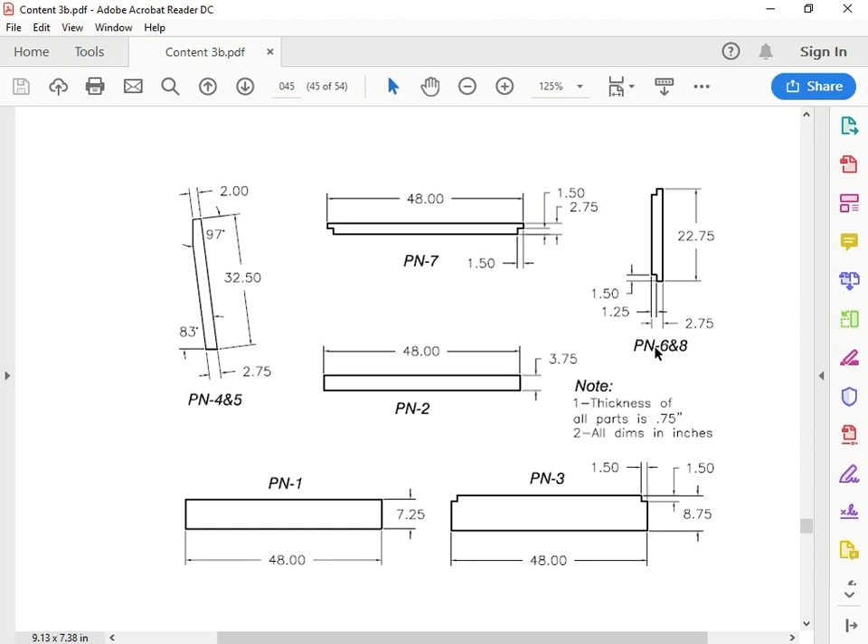Okay, so last time we built all the pieces. There's part 1, part 2, part 3, part 4, and 5, which means we're going to have 2 of these pieces. 6 we have here, 7, 8 again, and we're going to assemble the piece together.

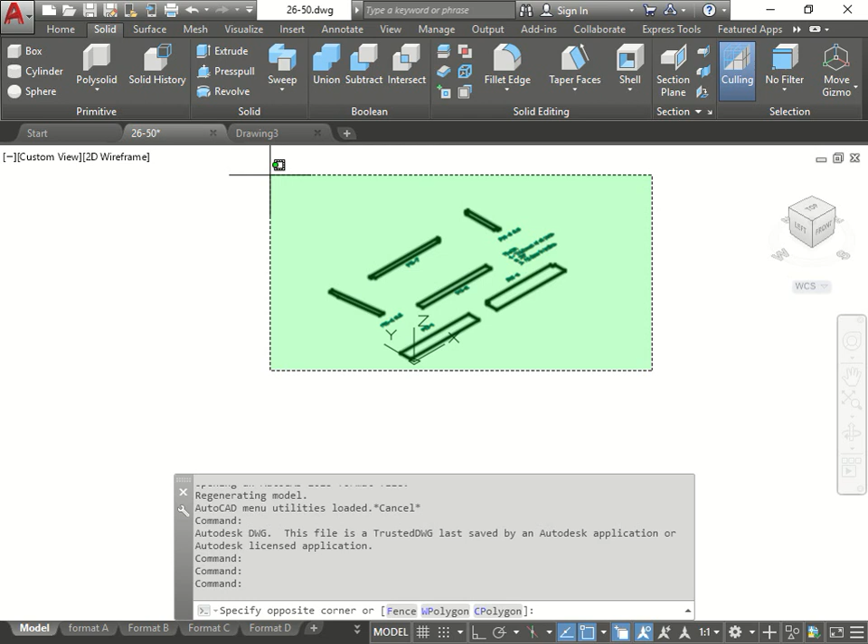So we're going to open up the file we worked on before. If I close it, in this case it's open. I'm going to start a new file like we've done before. Open a new file, go back over here, and now we're going to select everything we did before. So I'll do copy, then go back to the new file and paste it in. Why am I doing this? This way we have the pieces and we don't affect our other sheets that we had worked on before.

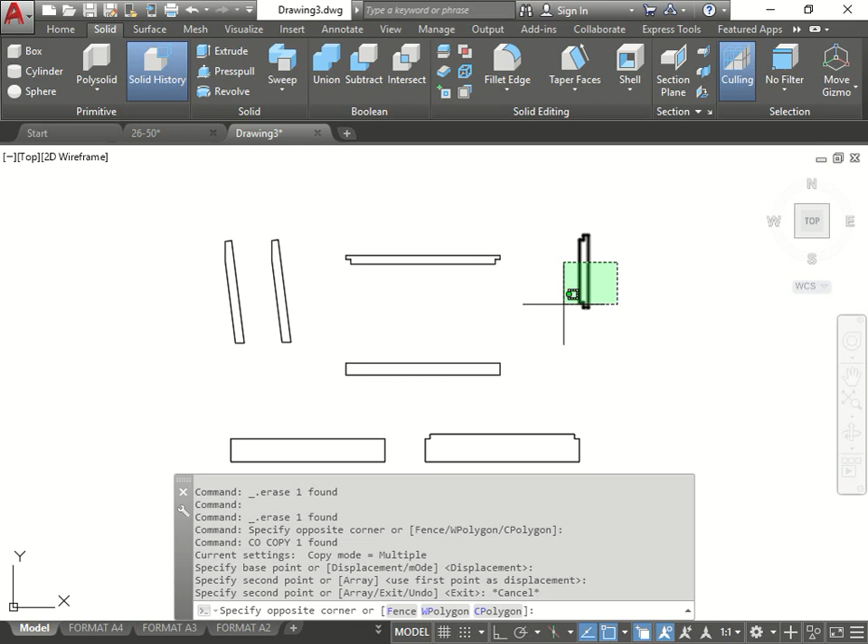Now we notice that this one here should be copied 2 times, so we'll copy it over. And like we saw before, this one here should be copied 2 times too. So now we have both pieces copied together. The next step is we're going to start assembling.

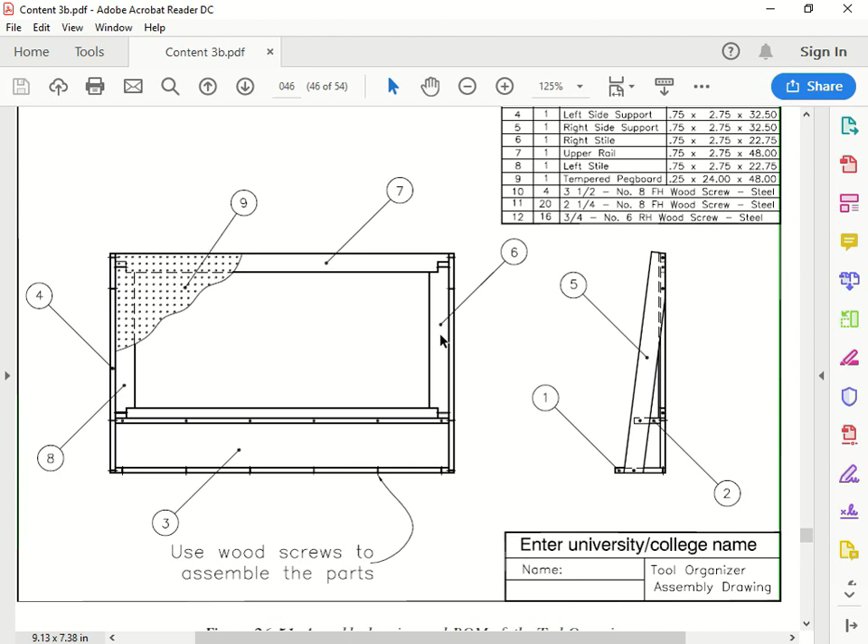So let's go look at the assembly page. This is the assembly of what we're going to be building. If you notice here, we have our pieces. We have the first one at the bottom. There's the second piece, which is the little shelf area, right over here. Then we have the third piece, which is the back. Then the fourth, which is the side. The fifth, which is the other side. Then comes the sixth piece, over here. The 7th is on top, and the 8th is over here. And then we're also going to do this view here at the end to show it when it's done. All right, so that's what we're going to be assembling today.

So we took the pieces we already built last time in the first part. If you didn't see the first part, how we built them, you could look at the other one, called part 1. Now we're going to start assembling it.

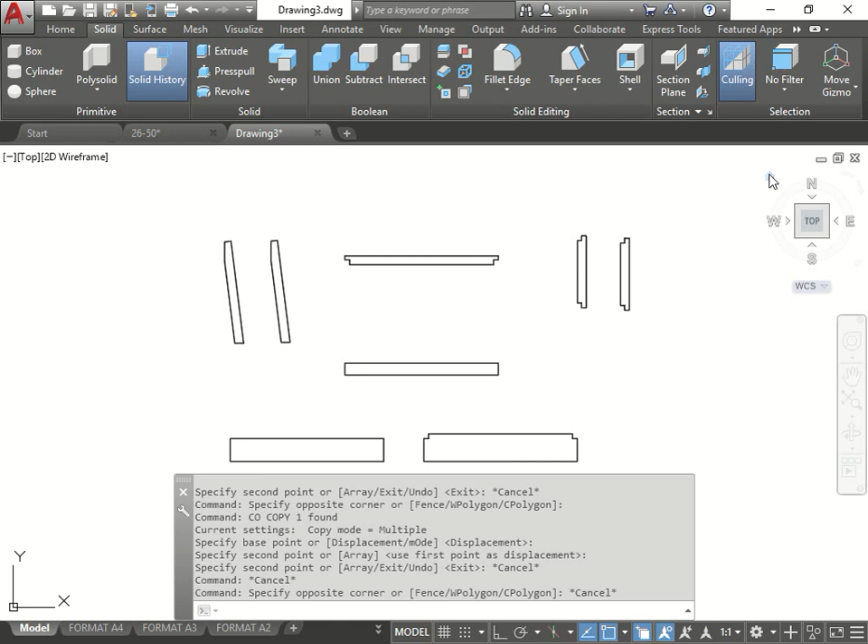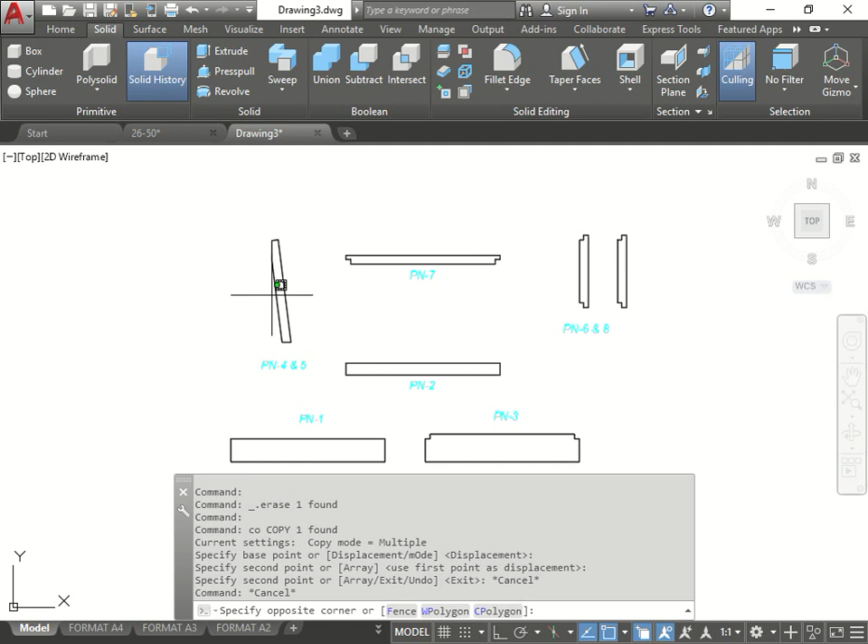Let's go right away and put our 3D view. I could decide which one to start with. I'll start off with grabbing number 3, which is the one over here. I could have kept the names to make it a lot easier. Maybe I'll do that so we know which one is which. There we go, I'll keep the names for now, and I'll just copy this one over to this side, and this one here, copy it over to the other side. So now we have the names. I did a little bit of undoing.

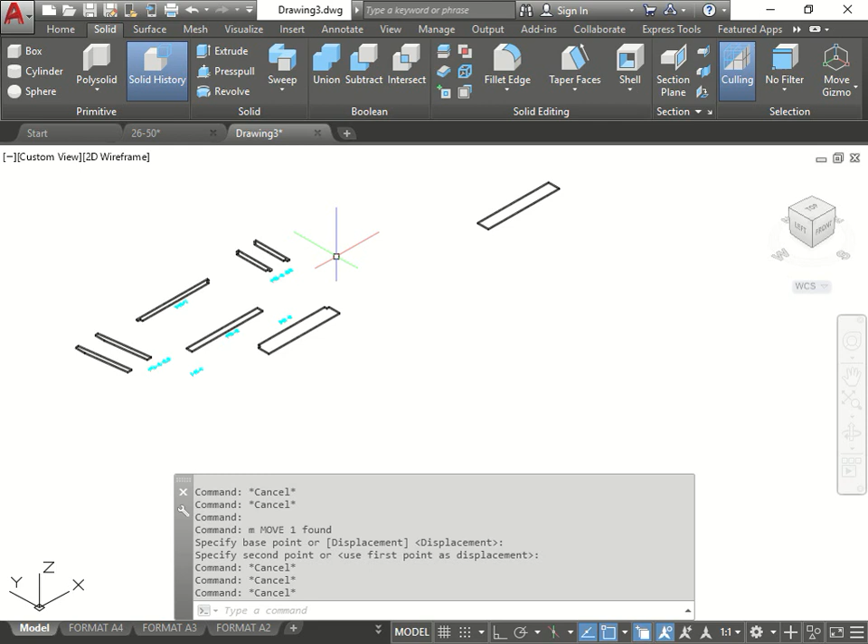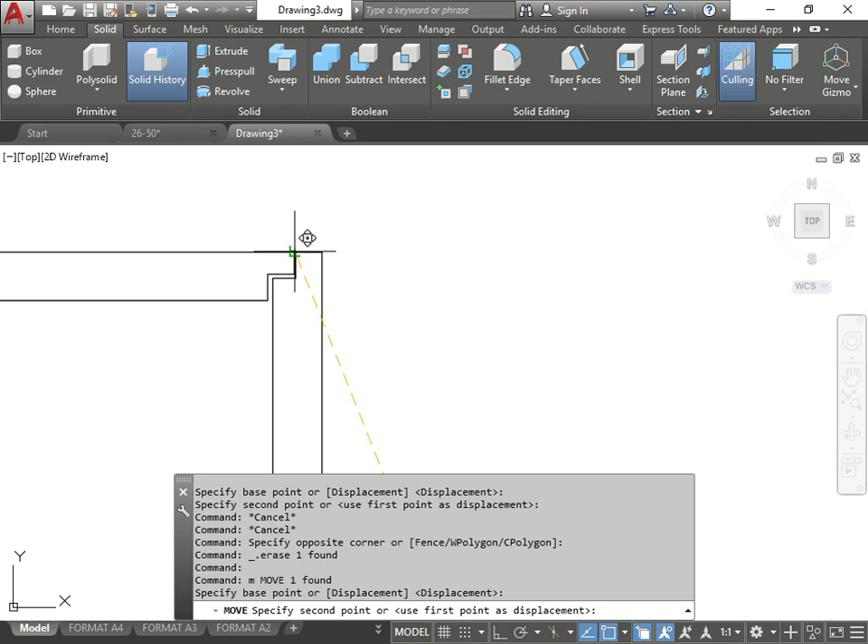It's okay, let's go start assembling it. So now we have the first piece, which would be this guy over here. We're going to move him over here so it's out of the way. Then we're going to go to the next piece, I guess we could build a frame right away. Let's do it from the top view. Let's grab number 7, which is on top, and move it up here. We don't need this anymore. We're going to grab number 6 on the side, and move it from this corner here, pushing it to this corner over here. Is this right, 5, 6? Yeah, it should be.

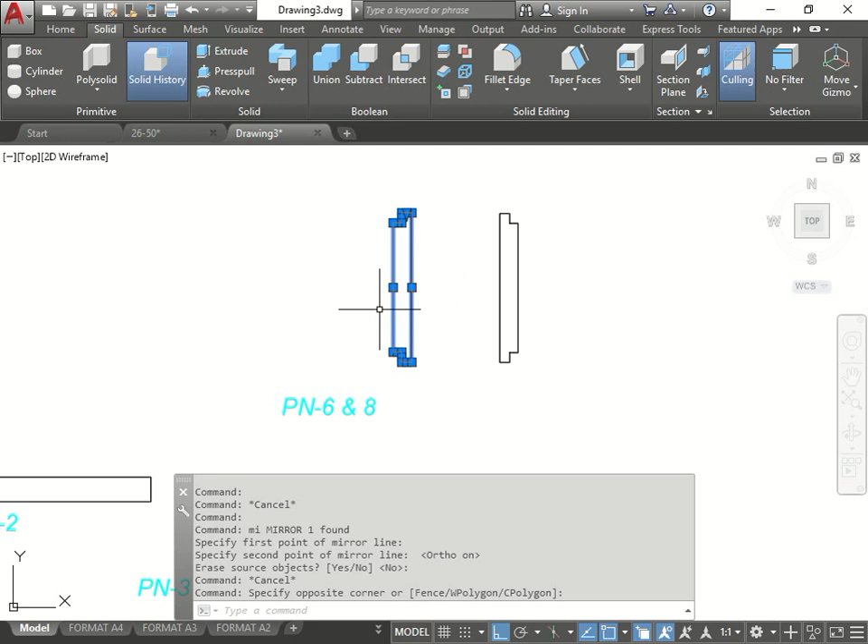Something looks wrong here, we're going to try it afterwards. We're going to put this one to the other side. We're going to mirror this over using the mirror command. We're going to grab this guy and move him to the other corner.

We're going to check afterwards in 3D what's wrong with it. We're going to go here. Oh, there we go, it goes on the inside. That's what I did wrong. Go move, this piece here should go here.

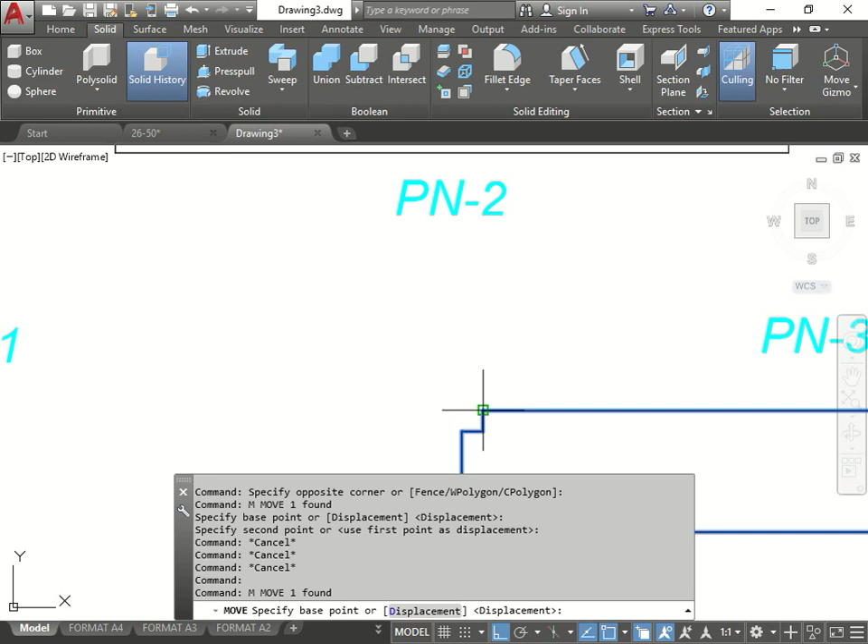So now we have the frame. Now let's add the bottom part, which is P3. Move it up, and we're going to move it all the way up here as well. So now we have the 3 pieces set.

Let's go look on the 3D how it looks. As of right now, they all look good except for a few. Some of them are a little bit higher. So these are good, the first 3.

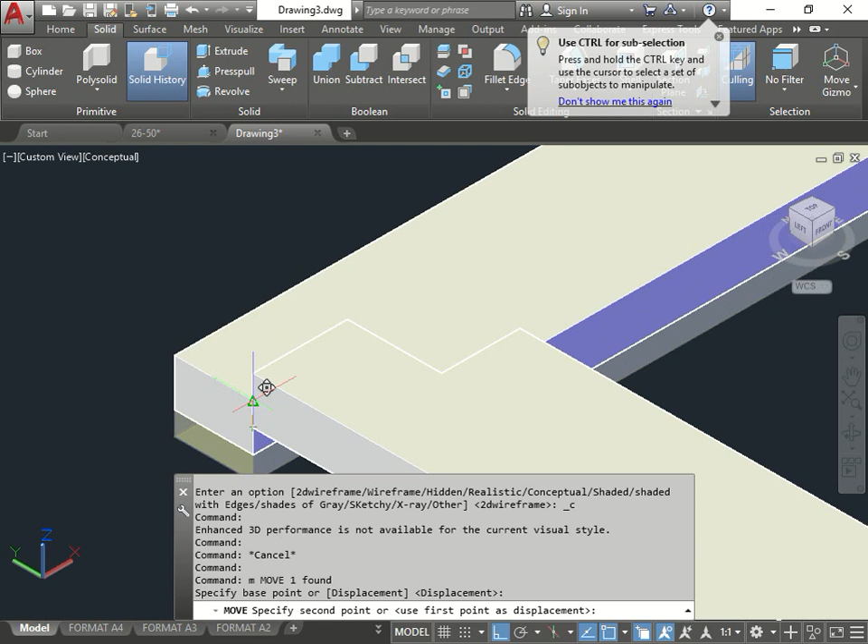The first one we did was a little bit low, so we grab it, we move again, grab from the snap from one corner to the next. So now we have the completed whole piece.

What we can do next is grab everything, use the 3D rotate that we worked on, and go on the red and go straight up. Accept. And now we have the top piece.

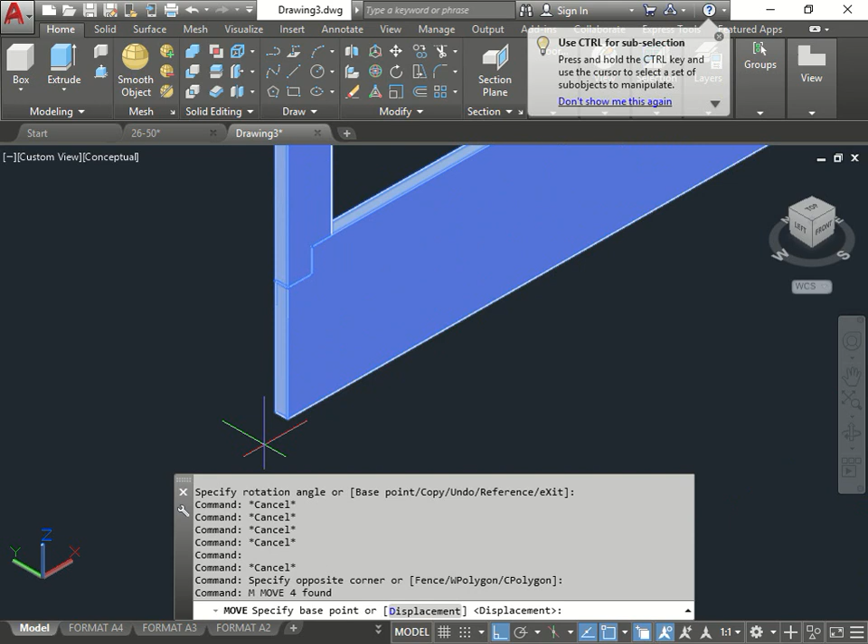We're going to grab now the whole completed piece, and move it on top of part 1 that we worked on before, which is right over here. Right here is number 1. So now we have the assembly.

So all that's missing now, we get rid of this, is we're missing, this one here would be the opposite as well. I can mirror or I can rotate it. P2, yeah P2 is going to be right over here.

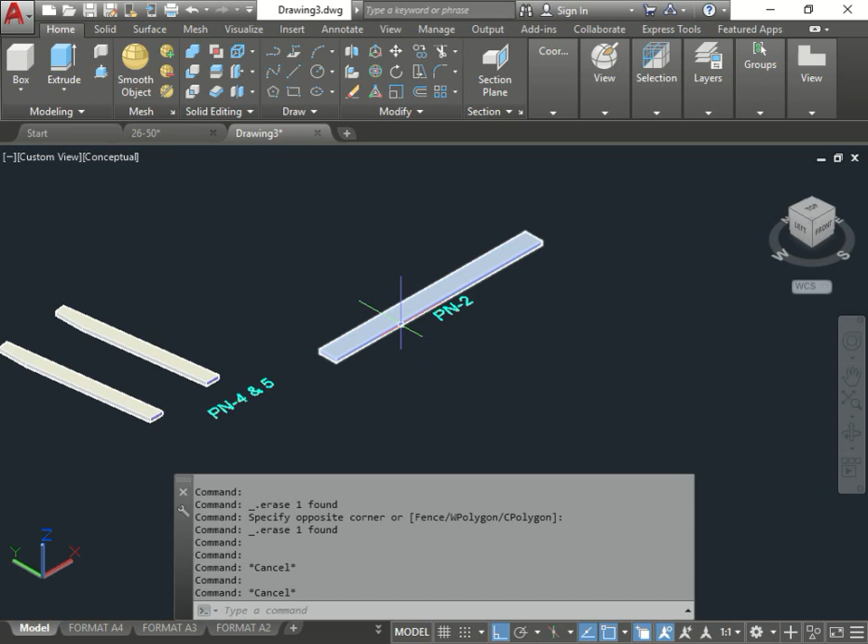We're going to move it, we're going to go from here. We're going to move it up to right about, according to the picture, right below the piece, so we'll put it right halfway.

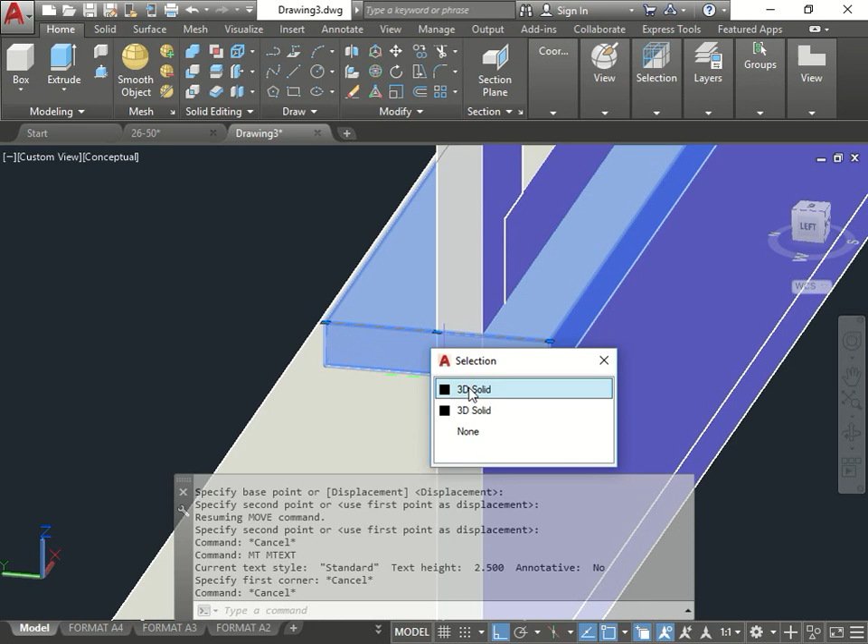Then we're going to grab it again, move again, move it. We're going to grab the solid, M for move, grab from here, we're going to move it back over here. So now we have that other piece over there.

The next piece we're going to do is we're going to rotate these guys. Rotate, use the red, and go straight up. We don't need this anymore.

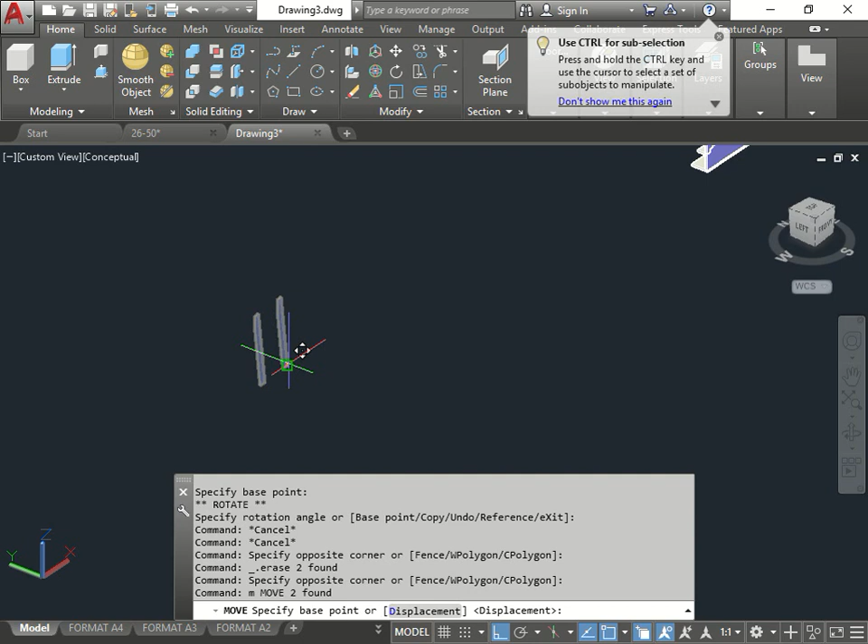And we're going to bring it next to the last two pieces. So we're going to move this one here, right over here. And we're going to look again at the piece.

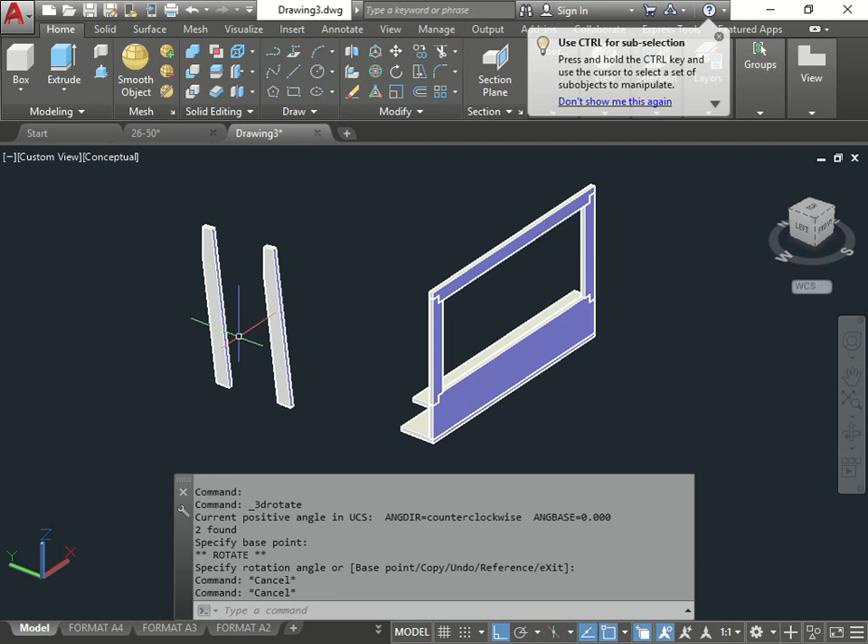If you notice in the front, it goes flat at the bottom and the cut is on the top piece. So when we're looking at this, we should technically rotate these guys. Rotate the blue straight so they're actually the same orientation.

But again, if you notice, we did it the wrong way. So technically speaking, we should rotate again, the blue, and go until we get to the other direction, like so. Now all we have left to do is just grab this piece here, move it from this corner here

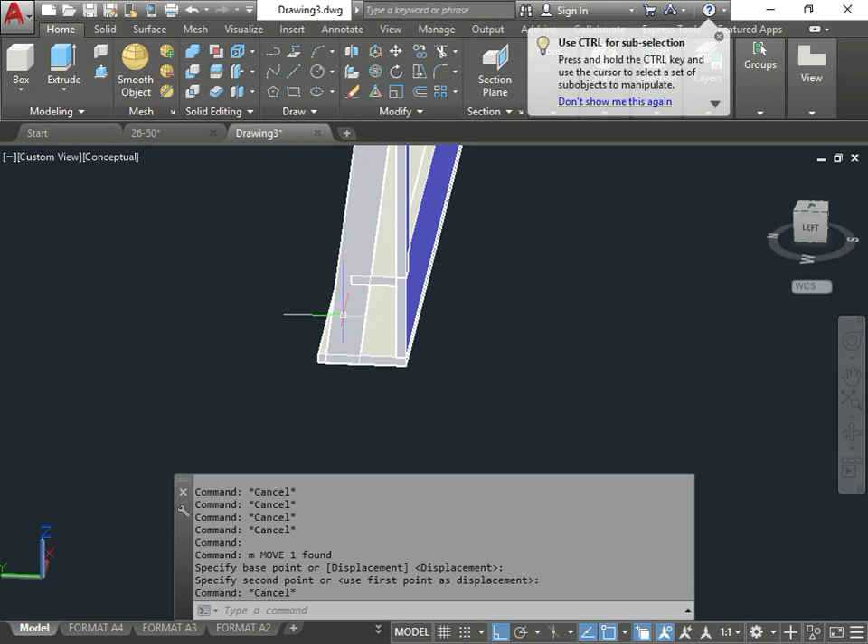to this corner up here. There, that assembly is actually touching the bottom. We're going to go look at that afterwards of why that's working like that.

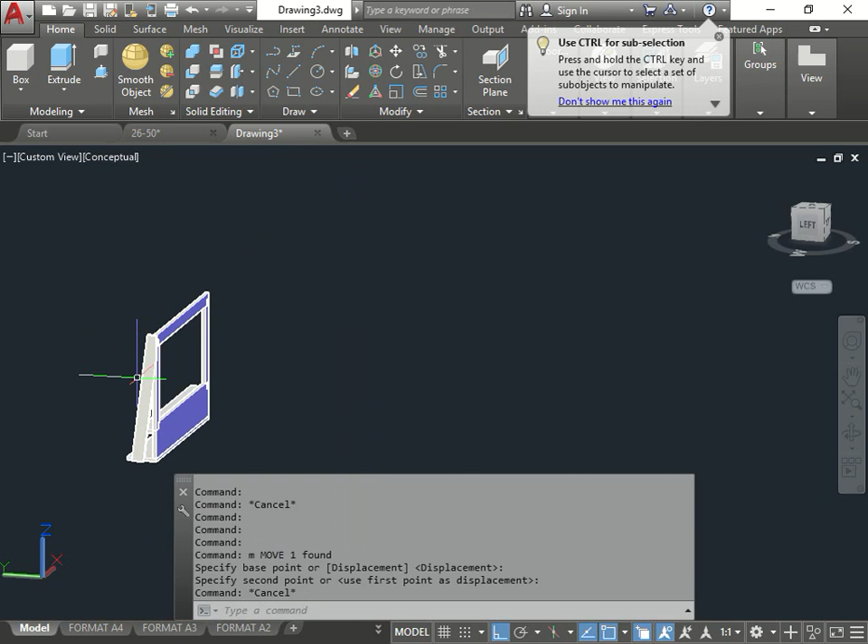Oh, that's why. See, we did a little mistake again. This piece here actually should move, go from this corner to this corner. That makes more sense.

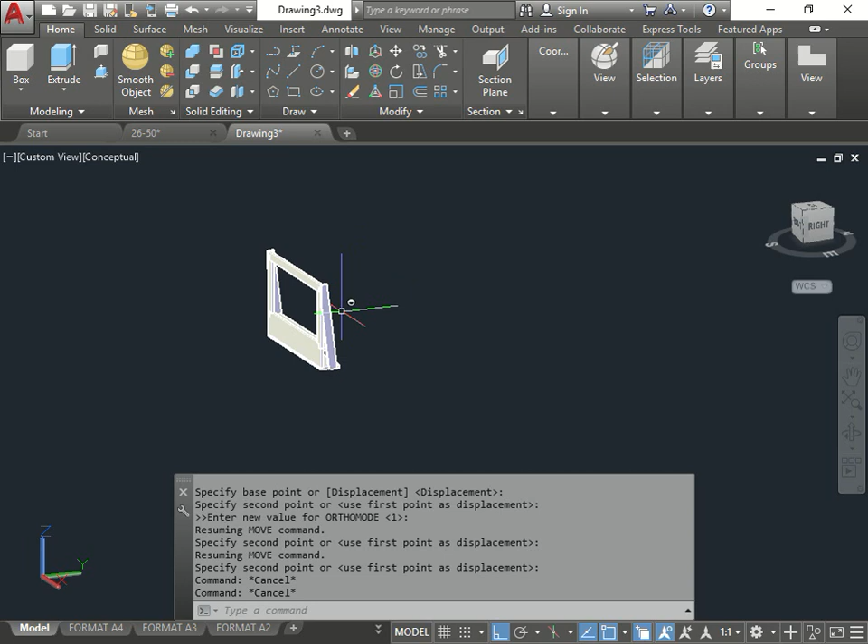Now we can mirror to the other side, or we can continue building it by doing move, grab this corner right over here, and rotate the object, and put it over here. So as you can see here, we've connected the two pieces. There you go, so now it looks like it's actually done.

Press the home button, and there's our assembly of the piece.